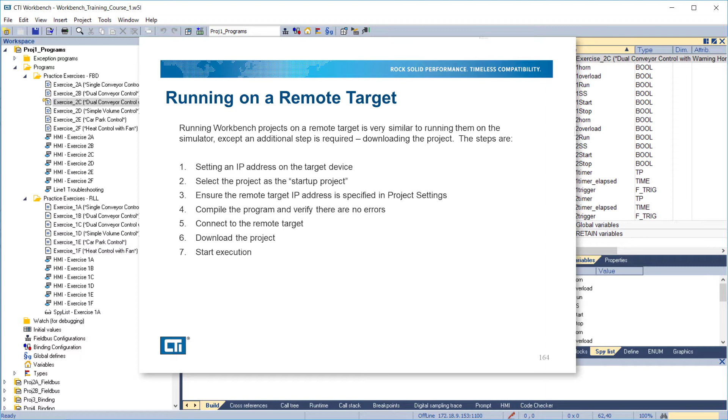Select the project as a startup project. Ensure the remote target IP address is specified in project settings. Compile the program and verify there are no errors. Connect to the remote target. Download the project, and start execution.

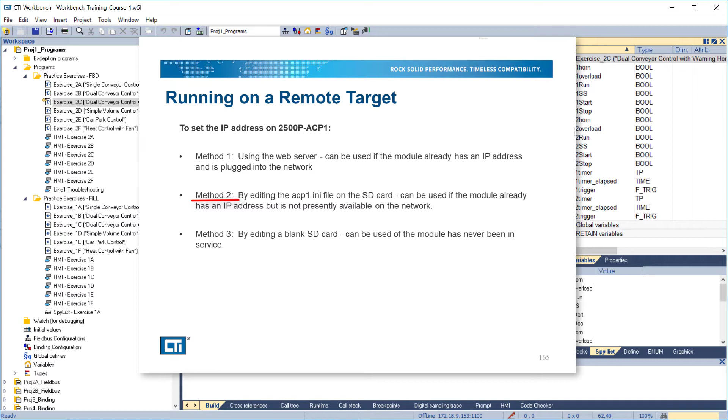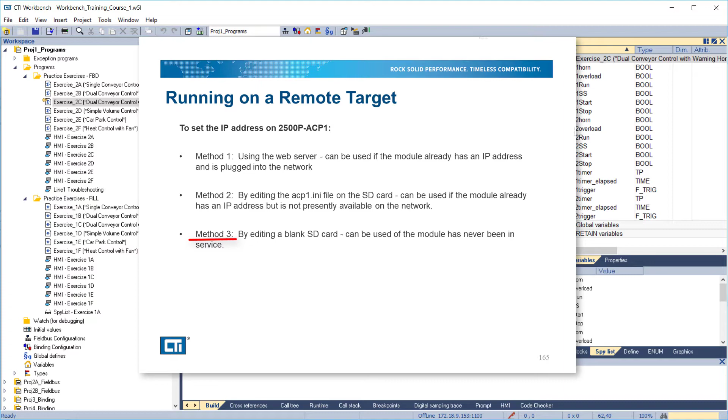If your target device is a 2500P ACP1, there are 3 methods to set the IP address. Method 1 uses the web server, and can be used if the module already has an IP address and is plugged into the network. Method 2 involves editing the acp1.ini file on the SD card, and can be used if the module already has an IP address but is not presently available on the network. Method 3 starts from a blank SD card, and can be used if the module has never been in service.

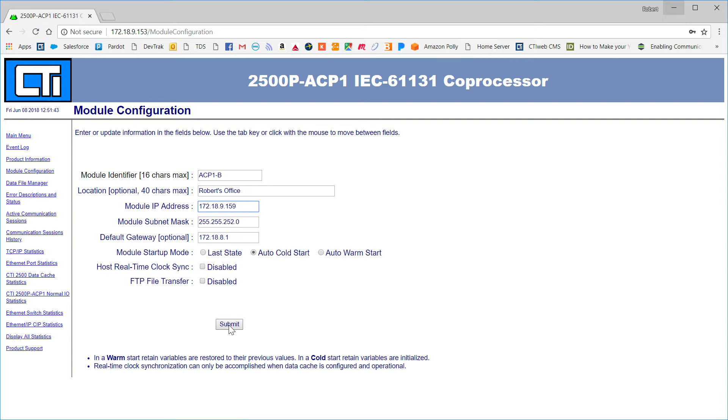To use Method 1, simply open a web browser, then type in the IP address of the ACP1 module. Once the module web page comes up, click Module Configuration. Then on the configuration page, enter your desired IP address, subnet mask, and gateway. Then click Submit. You will need to restart the module using the recessed Reset button on the front panel to make the address change take effect.

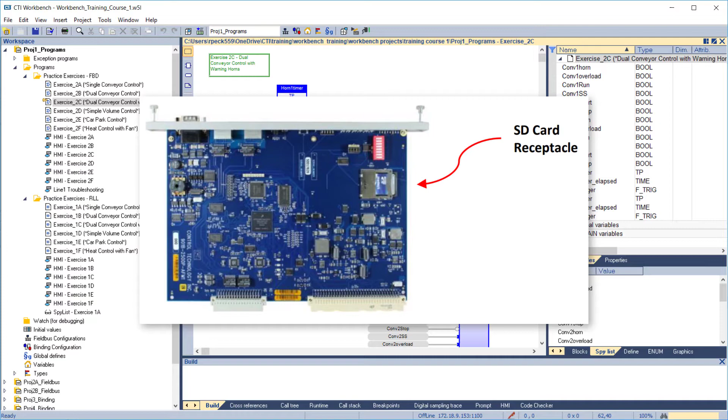In Method 2, we'll edit the configuration file, which is located on the SD card in the module. You'll need to power down the module and remove it from the base. Then remove the SD card and insert it into the SD card slot in a PC. Open a File Explorer, navigate to the ACP1 folder, then open the acp1.ini file for editing using Notepad. Find the address section of the file, then change to your desired address, subnet mask, and gateway.

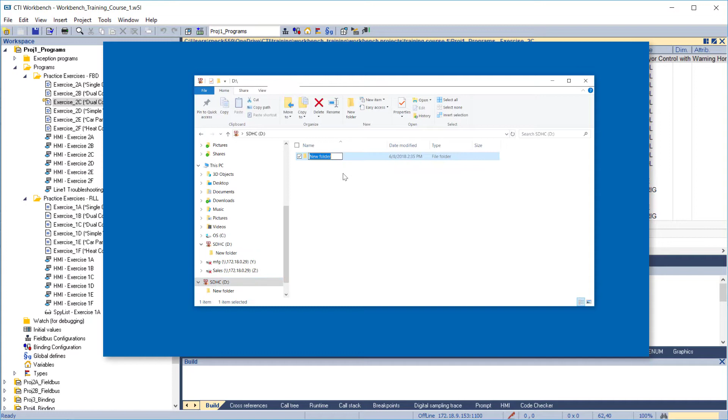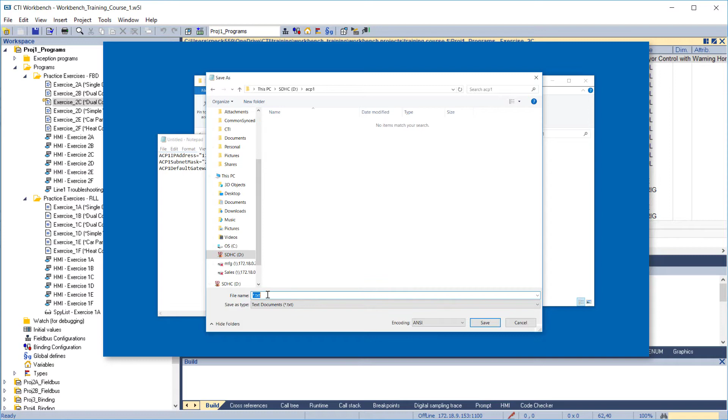Reinstall the SD card and power up the module. In Method 3, you'll start with a blank SD card. Make a folder, ACP1, on the card. Using Notepad, create a new file and insert the lines for IP address, subnet mask, and gateway. Save to the file acp1.ini, in the ACP1 folder you created. Move the edited SD card to your ACP1 module, and power up.

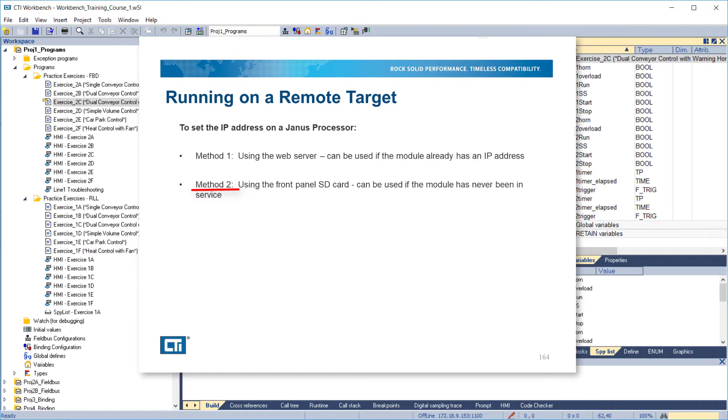If your target device is a JANUS processor, there are 2 methods to set the IP address. Method 1 uses the web server built into the JANUS processor, and can be used if the module already has an IP address. Method 2 places a file on the front panel SD card, which is read in on power up, to set the IP address. This method can be used if the module has never been in service.

To use Method 1, simply open a web browser, then type in the IP address of the JANUS processor. Once the module web page comes up, click Configuration, then Network Settings. The Network Settings page allows you to configure the primary address, and up to 3 alternate addresses. Alternate addresses allow you to communicate on additional IP networks. It is not permitted to configure overlapping address subnets, or assign more than one IP address from the same subnet.

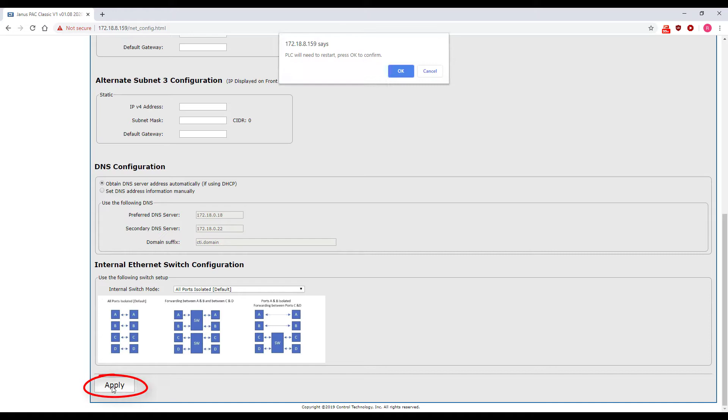The primary subnet IP parameters can be automatically obtained by DHCP, or statically configured by entering the IP parameters. DHCP is not recommended for operational use, since it is possible to receive different IP addresses from DHCP over time. When complete, click Apply, and the changes will take effect immediately.

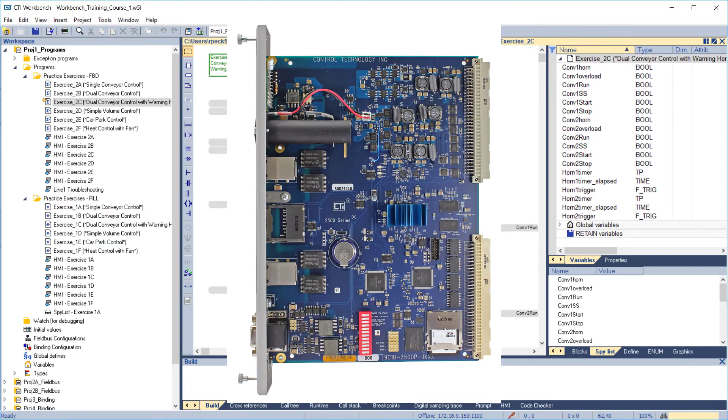To use Method 2 to set the JANUS IP address, first remove the processor from the base. Make sure module switch number 2 is set to the open position, and set module switch number 4 to the closed position. Obtain a blank SD card.

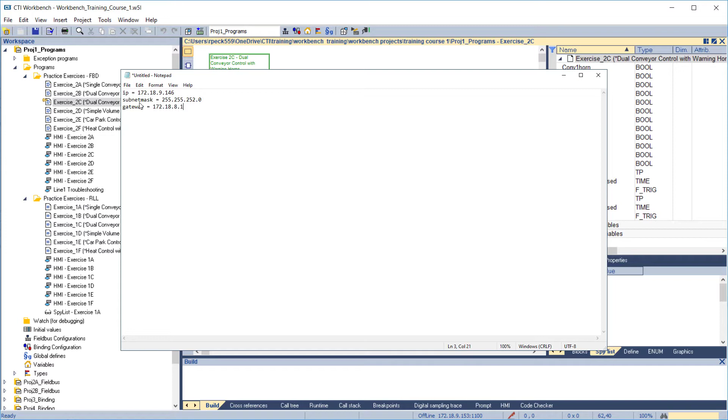Open a new file with Windows Notepad, and insert the lines, substituting your desired addresses. Save the file using the name cti.ini in the root directory on the SD card.

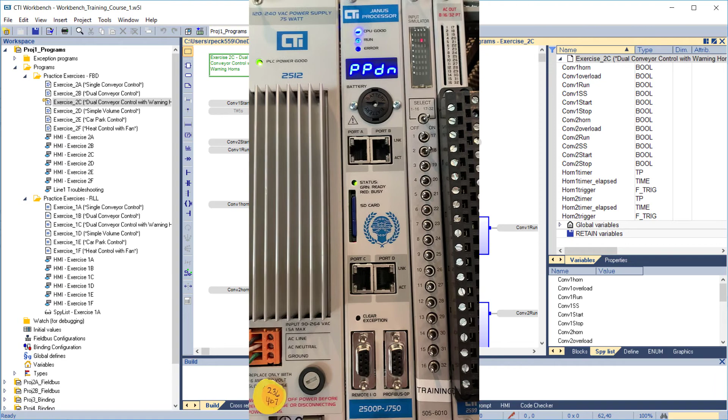Install the SD card in the processor, and install the processor into the base. Apply power. The processor will display the code PPST on the front panel. If there are errors in the cti.ini file, the code PPER is displayed. If there are no errors, the address is accepted, and the code PPDN is displayed.

Now, power down and return switch 4 to the open position. Remove the SD card from the front panel, and reinstall the processor into the base.

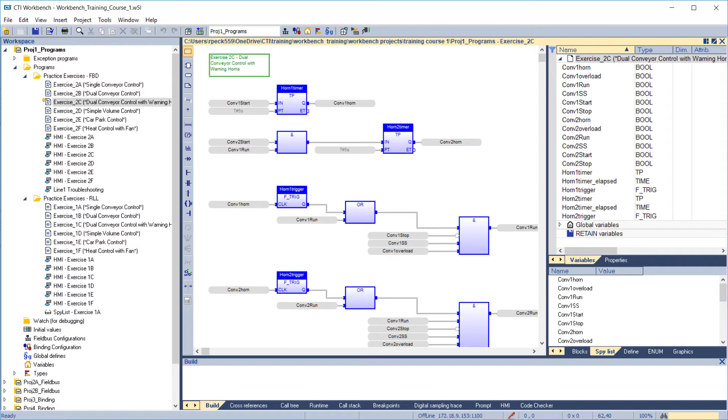Once the IP address of the target is set, and it's connected to the network, we're ready to download our project. First, be sure the project you want to use is set as the startup project. Then right-click the project name and select Communication Settings.

Be sure the IP address here matches the address of your target. Edit it if needed. Next, if you've made changes to the project, compile it. Then click the online icon in the toolbar to connect to the target.

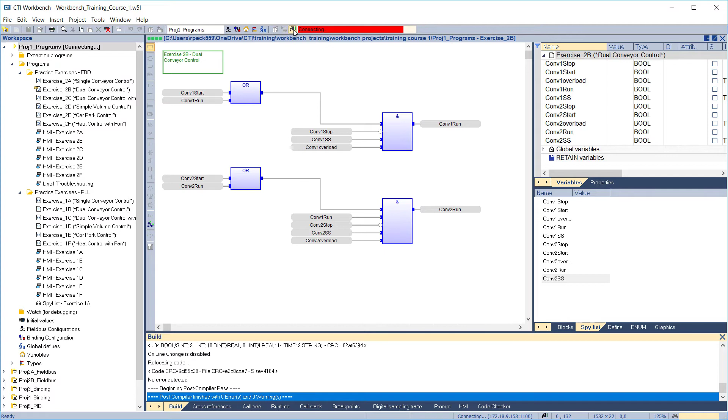What happens next depends on what project is presently loaded in the target. There are 5 possible scenarios: can't connect to target; no project loaded in target; project in target is different from the one open in Workbench; project in target is the same as the one open in Workbench and the same version; or project in target is the same as the one open in Workbench but a different version.

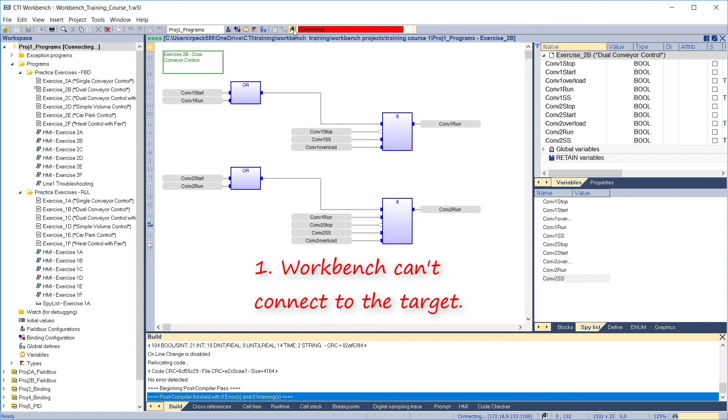If Workbench can't connect to the target, the status display will show communications error. When this occurs, you should check and correct any network problems that are preventing communication with the target.

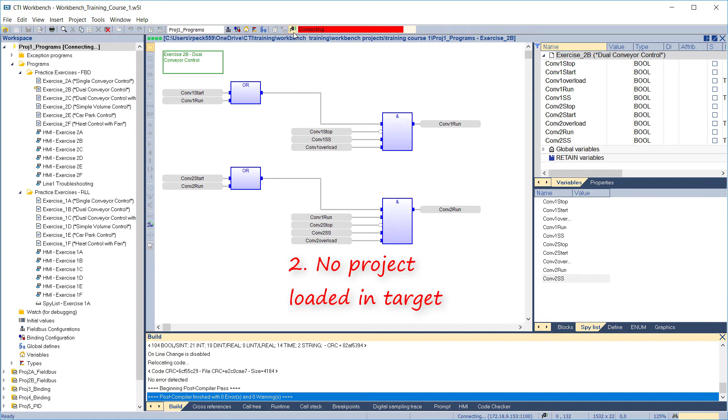If there is no project loaded in the target, you will get this message, showing there is no application, and asking if you want to download.

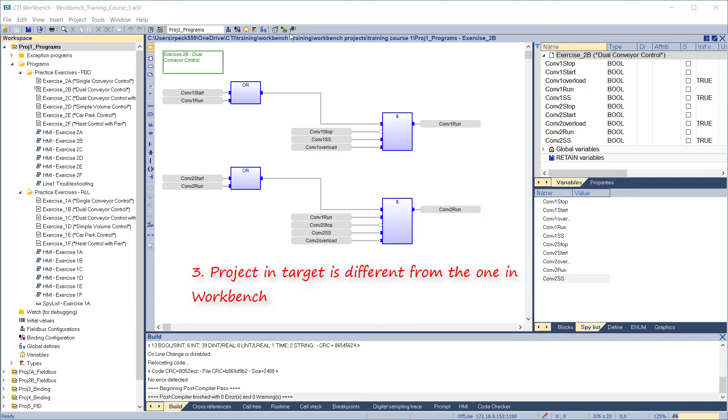Click Yes to proceed. If the project in the target is different from the one open in Workbench, the name of the project in the target is displayed. If you want to replace it, click the stop icon. The status bar changes to show no application running.

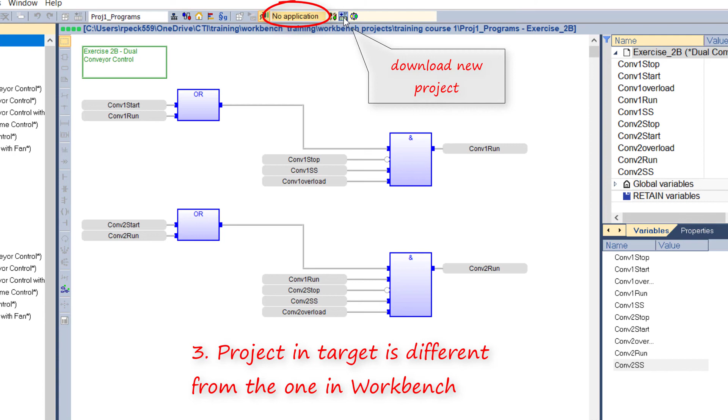Then click the download icon. A project downloads and the status bar shows stop.

If the project in the target is the same as the one open in Workbench, and is the same version, the status display will show either run or stop, depending on whether the project is running or not.

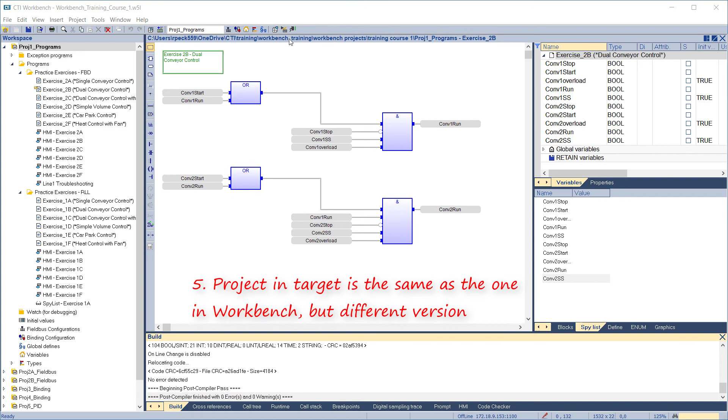If the project in the target is the same as the one open in Workbench, but a different version, the download dialog box will come up. The box displays the version information of Workbench and the target, and gives you 3 choices to continue: stop and download, online change, or do nothing.

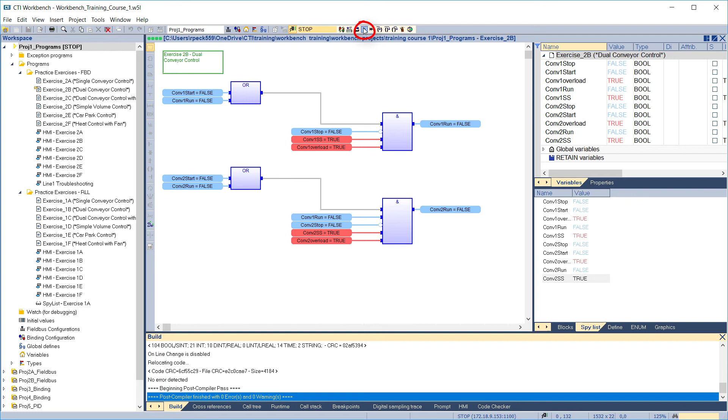Once you have successfully downloaded your project, you can start execution by clicking the Resume Cycle button. This is our conveyor project from Exercise 2B. Now that it's running, we can operate the conveyors.

That completes Course 1, Part 6. Here's a summary of what we've covered so far: introduction to Workbench in IEC 61131, basic concepts of Workbench, getting started programming in Workbench, programming in ladder diagram, programming in function block diagram, and running on a remote target.